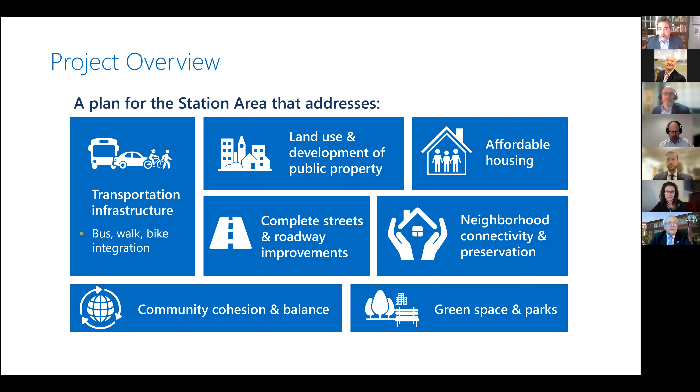Neighborhood connectivity and neighborhood preservation is something that very clearly was identified in conversations with the community as vitally important, along with community cohesion and balance, and opportunities to enhance green space and provide more open space and parks. So those are the areas of the plan we're addressing and the priorities for the plan.

Project goals: adaptive reuse of the train station, making it a multimodal transportation hub, improving neighborhood connections within the neighborhood and from the neighborhood to the station itself, ensuring provisions for affordable housing are built into the plan, filling in empty underutilized lots, whether surface parking lots or vacant parcels, preserving the historic neighborhood and historic character, and looking at opportunities to accommodate facade improvements to buildings. And as I mentioned, identifying future build out potential on both the east side and the west side of the station.

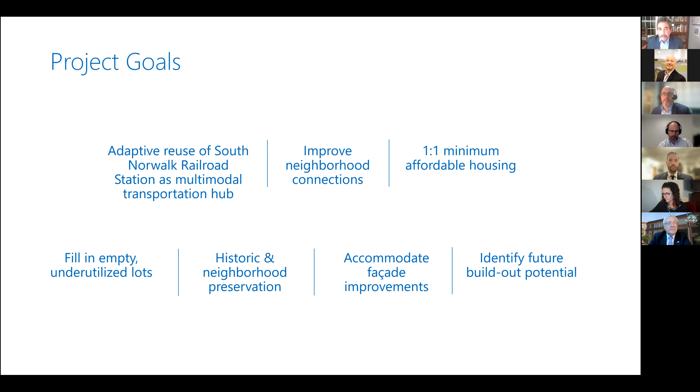To orient people, this is our study area identified. There are basically six areas. We refer to them as the east side of the station and the west side of the station. On the east side is basically the station itself, which includes the parking garage, the station, and the parking lots that accommodate commuters using the station. Also on the east side is number 3, the Lexington Avenue area. On the west side are three areas: the Housing Authority property identified as number 6, the SNEW property identified as number 5, and the private development area identified as number 4, with Dr. Martin Luther King Junior Drive on the western boundary of our study area.

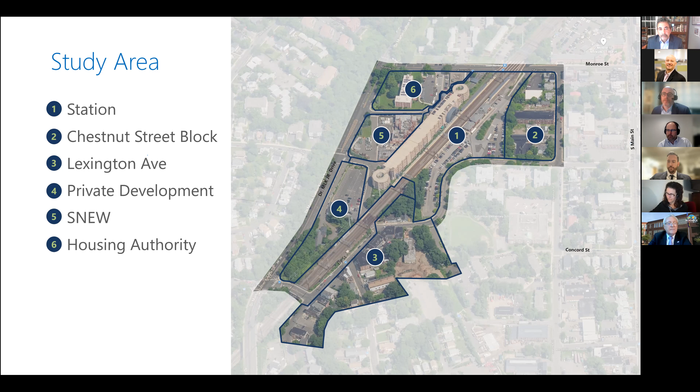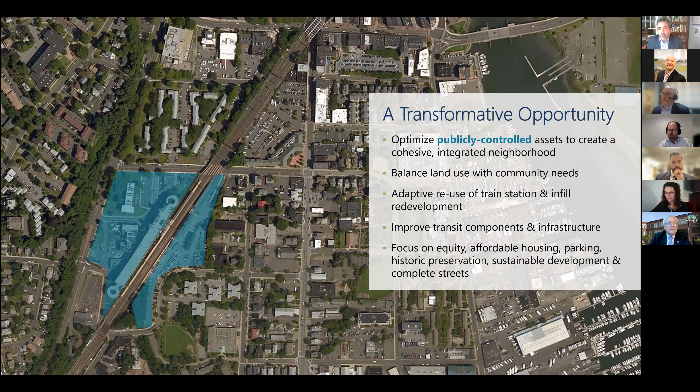So when we looked at this area, we really see this as a transformative opportunity for the city of Norwalk. You can see the study area identified in blue. We really want to optimize the publicly controlled assets. The blue areas are the publicly owned properties, and the yellow are the privately owned parcels within the study area, looking to optimize particularly the publicly controlled assets and create an integrated neighborhood.

Balancing land use with community needs was something clearly identified in conversations with the community. This includes looking at the adaptive reuse of the train station and infill redevelopment opportunities, improving the transit components and infrastructure around the station itself, and really focusing on equity, affordable housing, parking, historic preservation, sustainable development, and complete streets.

As Brian said, there's a lot going into this plan. It's all about trade-offs. We can't do everything, but clearly there are areas where improvements can be made. Based upon the community input we've received, we're balancing those needs with the future opportunities around the station itself.

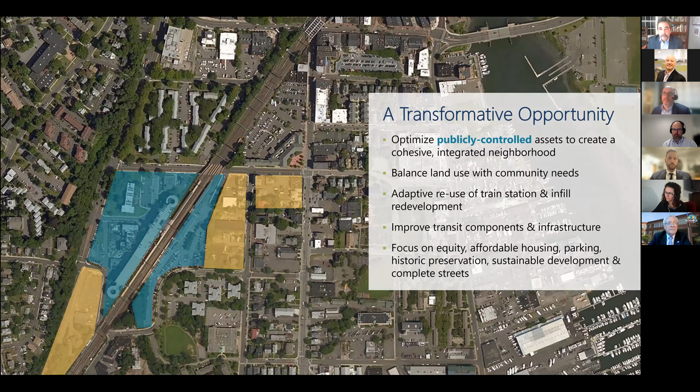Another area I highlighted is historic preservation and neighborhood preservation, looking at opportunities to protect the existing residential neighborhoods from inappropriate development, whether private or public, and protecting the historic building context around the area. You can see on this graphic there are a number of strong neighborhood assets and historic preservation areas we need to be mindful of.

We're looking to concentrate development, particularly higher density development, within a quarter mile of the train station, within an easy walk of the station, so people don't necessarily need to drive. They can walk from wherever they're living to the train station itself and take transit.

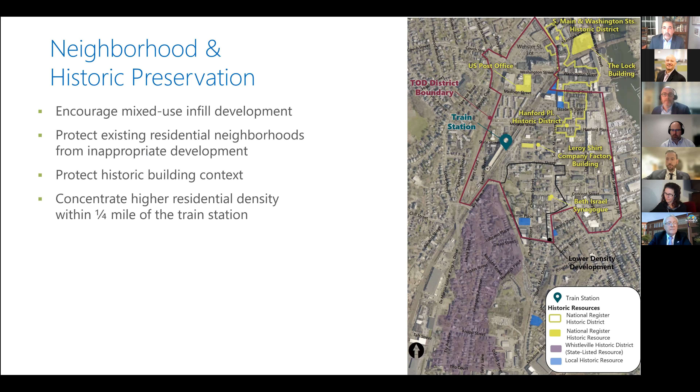As Brian and the mayor mentioned, I think one of the foundational elements of the plan is the extensive community engagement we've had. We've been working closely with a community advisory committee, as well as a technical advisory committee, presenting our work and getting feedback throughout the process.

We conducted a community-wide survey, and I'll highlight that in a moment. We got some really good responses on that. And then there are the public meetings, like the one we're having tonight—this is our second one. So I would just say that the plan has really benefited from good public input, and I would encourage people to continue to stay involved and offer their comments throughout the process of developing this plan.

So just to highlight a couple of the things that came up during the community conversations and the community input that we had.

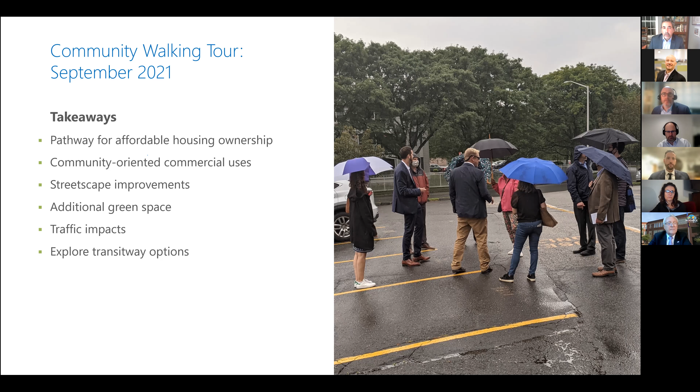You will hear momentarily from our traffic consultant, traffic expert, Joe Bauskas, on the traffic impacts, and then also on the transitway options. We have a portion of the presentation devoted to that as well. So these were the things that came up during our community walking tour.

Just some photographs of some of the areas that were identified during our tour of focus areas, the underpass at Franklin Street, needing better attention, the MLK Drive and Monroe Street intersection, bus activity at the station, Merritt Place. These were the highlights of the tour that we took with the community.

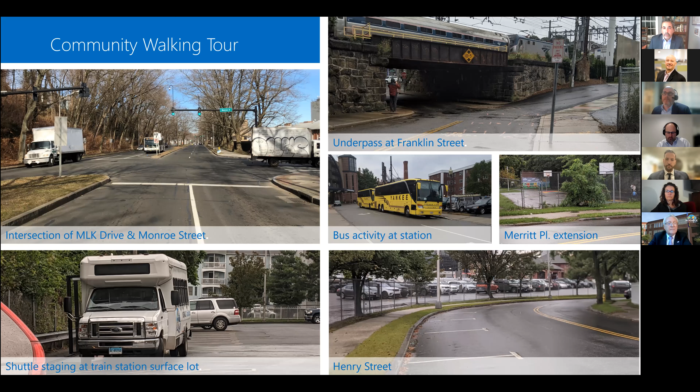There was also follow-up discussions with additional community input from District B, things like community amenities, facade improvements, tree planting programs, support for local service organizations, the YMCA and shelters, as well as preserving the quality of adjacent development, specifically the Columbus Court. And again, on the home ownership, a theme that came up was down payment assistance and opportunities to create home ownership for residents of the neighborhood.

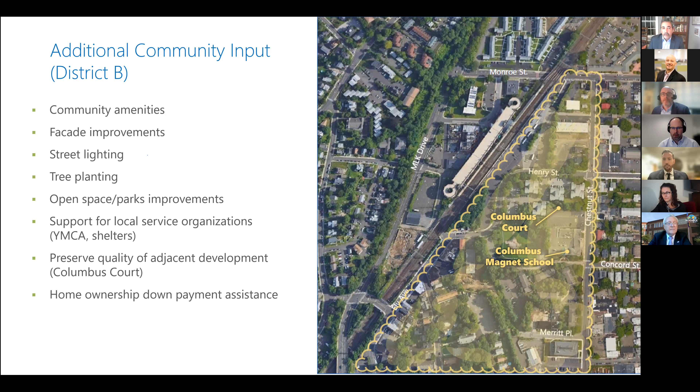As mentioned, there was a survey that was undertaken, approximately 280 respondents. Again, you can see themes coming up from the neighborhood conversations and surveys: a strong desire for neighborhood uses like grocery stores, restaurants, recreation facilities, and a strong desire for a more pedestrian-friendly walking environment with better sidewalks and improved lighting.

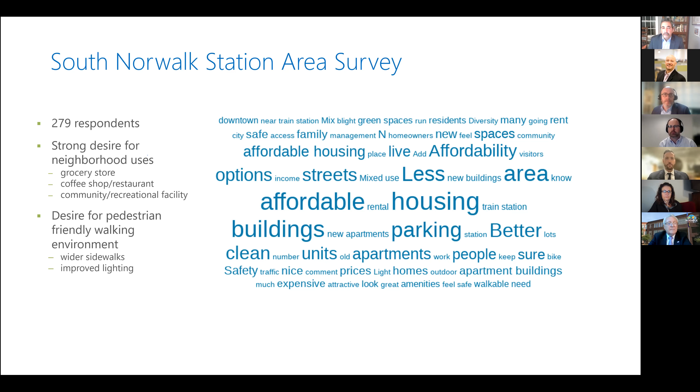Last month, we had another meeting with the Community Advisory Committee. We used that as an opportunity to have follow-up discussions from the September walking tour that was conducted. We really dug in more on the affordable housing ownership modeling, the transitway locations, the private development adjacent to the train station, updating the CAC on that, and then we reviewed as well the long-term development plan.

So as you can see, there was a lot of back and forth and discussions with the community leading up to where we are tonight. At this point, I'm going to turn it over to Eric Halverson, who is from RKG Associates. They are a consultant working with VHB and undertook the market analysis and looked at the affordable housing ownership modeling. So, Eric.

Great, thanks so much, Ken. Hi, everyone. Happy to be with you tonight.

Just in terms of the market, I think as Brian mentioned at the outset, Norwalk as a whole is a growing city, which is great from a market perspective. Over the last 10 years, both population and households have been increasing citywide, and as Brian mentioned, actually at a faster rate than both Fairfield County and the state as a whole.

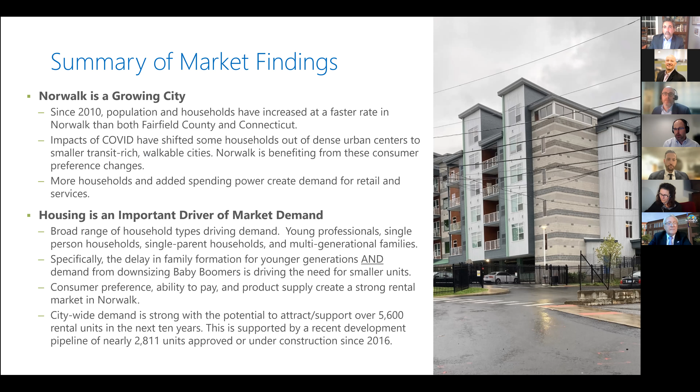Citywide, demand for housing is very strong, backed by the roughly 2,800 units that have been approved or those that are under construction since the year 2016. Next slide, please.

So looking quickly at non-residential market demands, RKG reviewed statistics on the office market, both in Norwalk and Fairfield County. Even prior to COVID, office demand in Norwalk had continued to weaken. In 2020, office vacancy was at about 29%, with a net loss of occupied space of about 400,000 square feet. But to project future demand for office, we look at employment trends countywide, and we assume a portion of that countywide employment will drive office demand in Norwalk.

While Fairfield County's office occupying sectors are projected to grow, Norwalk's current office vacancies could likely accommodate much of that employment growth over time. We do, however, believe that there are some opportunities for maybe some smaller scale office users to occupy ground floor spaces in mixed use buildings in South Norwalk.

And then lastly, we look at retail and restaurant space demand. The linkage between people living and those who might be visiting South Norwalk and the support they provide to our local businesses is critical, particularly when you have more people living within a comfortable walking distance to, say, a downtown, a main street, or a retail center. The frequency of visitation for those households will usually outpace those that have to drive or come from some distance.

In September of last year, 2021, we conducted a field visit and a walking tour of both the Washington Street and the South Main corridors, and estimated about 20,000 square feet of vacant first floor space for retail and restaurants. These spaces range from as small as 1,000 square feet up to as much as 10,000 square feet.

With the current amount of housing, both under construction or those that are in the approval pipeline citywide, we believe there's support for about 46,000 square feet of retail space. This spending power from these future residents could really help support businesses to both fill vacant spaces, maybe even expand their existing footprint for those who are active in the city today, and also support the planned new retail that's part of some of the proposed projects in and around the city.

In addition to collecting market data, RKG also worked with the team to develop a financial feasibility model for new development in the study area. This model compares development and construction costs for a project to potential revenues from that new development to then determine if a particular development scenario makes financial sense or not. Would somebody actually build it?

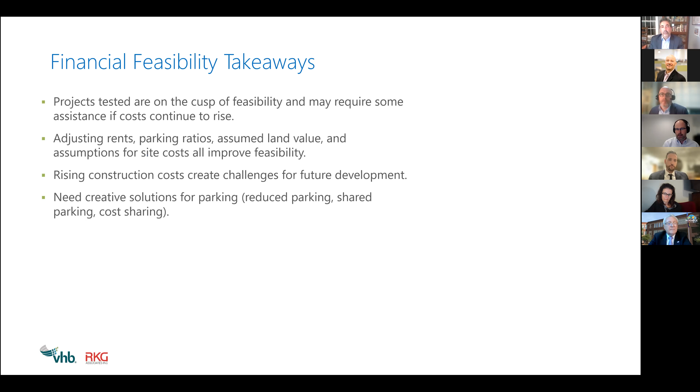And lastly, we recognize through our discussions, as Ken mentioned, just how important the concept of affordable housing and also affordable homeownership options are to the community. So we looked into some potential models that could be applied to this area and came away with three kinds of potential options for delivery of affordable ownership units.

These are ordered in the way in which we think they could be implemented, basically going from short term to longer term. So the first option is similar to what the city has in place now, which is referred to as inclusionary zoning and deed restricted units, basically affordable purchase prices. Through inclusionary zoning, the city essentially mandates through the zoning that a certain percentage of the units within a new housing development must have their sale price restricted or their rent rate restricted to an affordable price, typically set by the area median income.

The city has inclusionary zoning in place that regulates both rental and ownership development, mandating that 10% of all units in a development be made available to households earning 60% of area median income. Some cities have coupled this inclusionary zoning requirement with an affordable ownership down payment assistance program, since one of the more challenging barriers for low to moderate income households is saving enough for that initial down payment. This could remove a potential obstacle for those households.

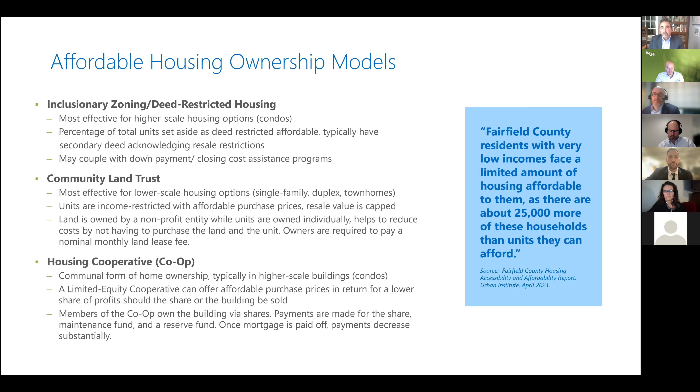I know we're going to move on, but I'll address Diane's point regarding green building design. That is definitely of critical importance to the work we're doing, as well as other work the Redevelopment Agency and the City of Norwalk are doing around sustainability and climate action planning. We're going to make sure a lot of the recommendations in this report reflect best practices from a green design perspective, as we have a transformative opportunity here to do things differently and do things right around the train station. So I appreciate your comment as well. But we have another good portion of our presentation to go through, so we'll keep moving here.

So here you can see the station layout and transit elements. I'm sure you're all familiar with the station, but here's how it all works. We have the bus drop-off and pick-up on the east side of the station, the surface parking lot also on the east side, and within that area there's also some space for bus staging. On the west side you can see the various garage access points, as well as dedicated customer parking for SNEW.

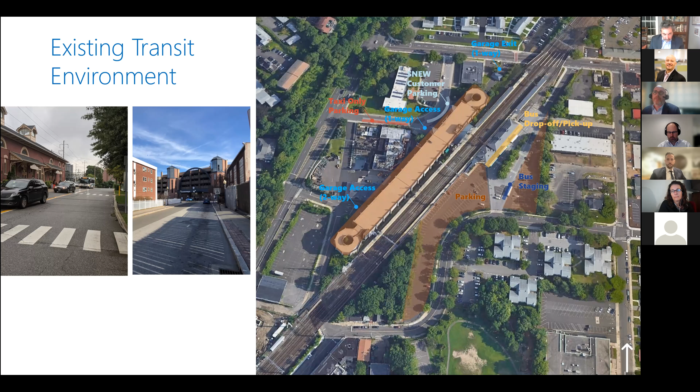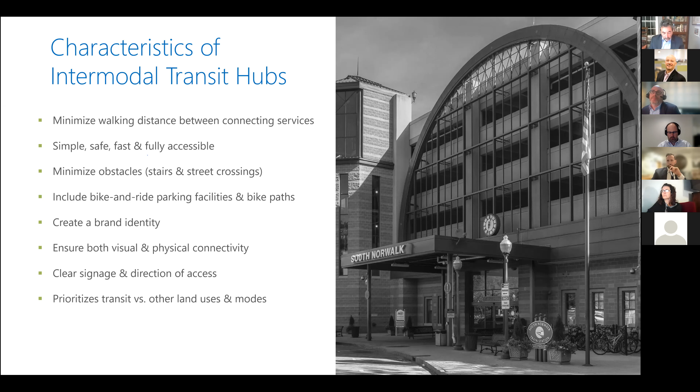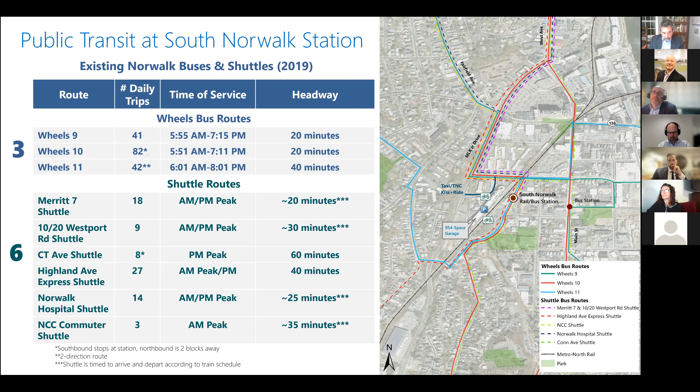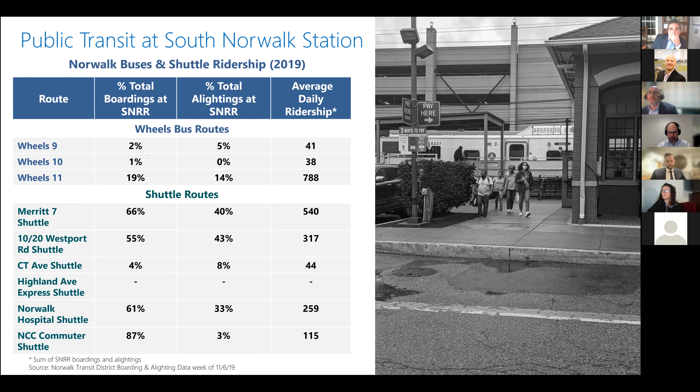So as part of this assessment, we looked at what we would need for bus space. I'll walk you through that right now.

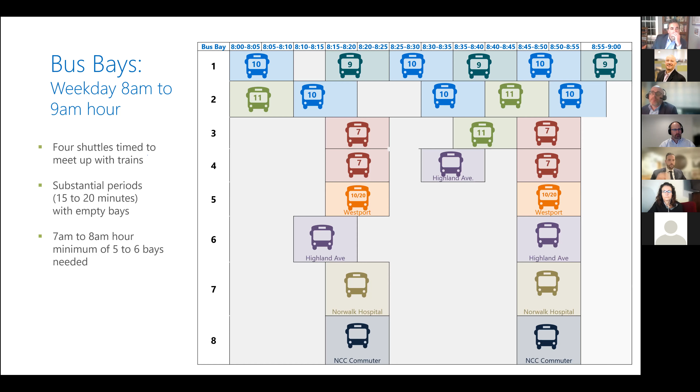One of the concerns we heard about a potential busway on the west side from the community was air quality emissions. We recognize this — this is more of a short-term issue, and it's important to keep in mind this whole plan is a number of years out, and bus technology is changing so quickly. So at some point in the near future, the bus fleet will be an all-electric fleet, and we won't have these issues with air quality. So really, that's a good thing.

Another significant challenge with this concept is that to implement the busway fully would require a relocation from the SNEW site. So we would need SNEW off that site to implement this concept.

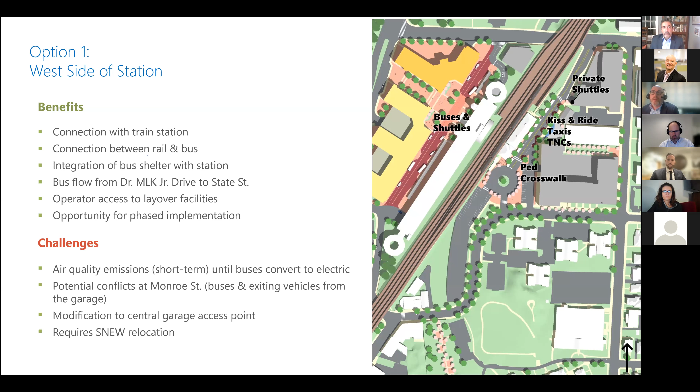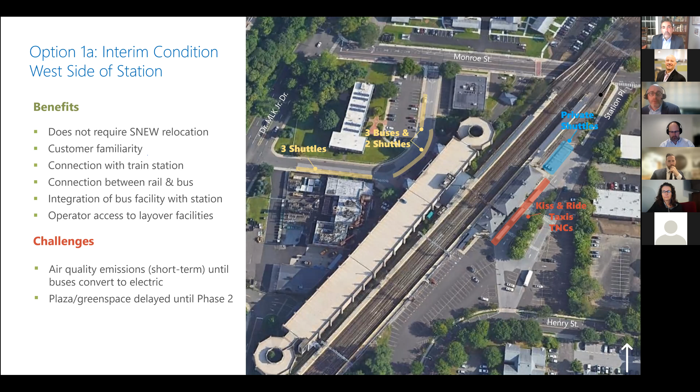I would mention on the east side, we would have the private shuttles and kiss and rides, taxis, and TNCs, so that would be for passenger pickup and drop off. An additional drawback with this is there is some dedicated SNEW parking for customers who would use the SNEW office, so that's something to consider as well.

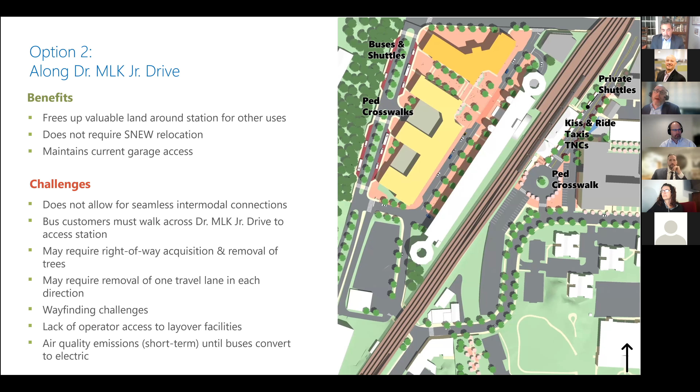Certain challenges with this concept include a lack of seamless intermodal connections. There is a distance that passengers transferring from bus to rail would need to walk — about 500 feet. So that's a bit more distant than previous options. This would also require removal of one traffic lane in each direction on MLK, so that's another drawback to this as well.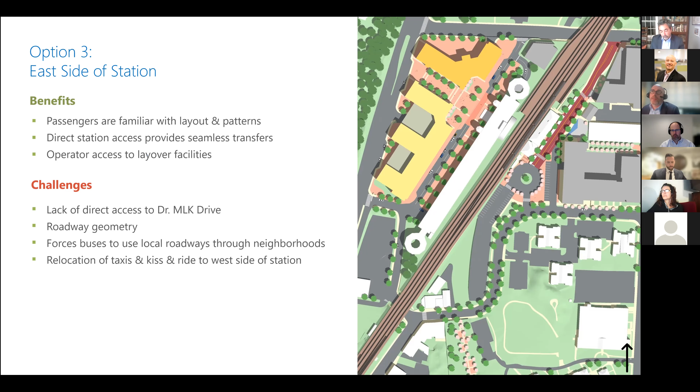So these are the three options we looked at. Here is a conceptual, high-level screening of the three options. We looked at locational decisions, aspects of transportation, environmental factors, as well as the ability to implement. The east and west side options score well.

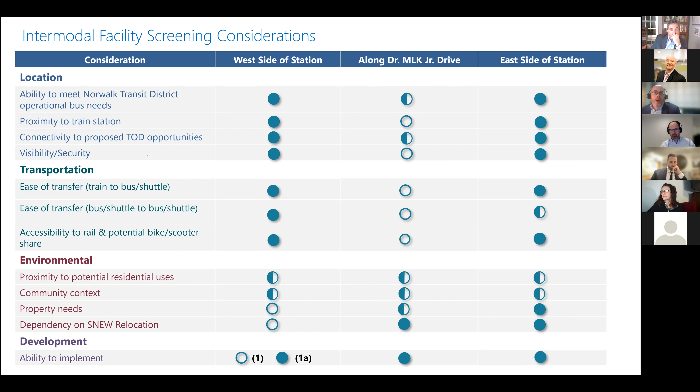Our recommendation in the near term is to utilize the east side of the station for the transitway as an interim measure. Longer term, once SNEW is relocated, our recommendation would be to build out the west side of the station for the transitway. This would offer the long-term opportunity to develop South Norwalk Station into a really integrated transit facility for the future.

So quickly, here are our transit recommendations. As I mentioned, on the east side of the station, we're recommending that for near-term implementation. The west side transitway in the longer term offers long-term benefits, operationally for better bus operations. This is something the transit district can also account for as they plan, should they plan for a bus network redesign to improve their system — the ability to reduce operating costs with a dedicated facility. It also offers the ability to better time buses to optimize transfers, and layovers can also be prescribed.

And I should mention, with the west side transitway, the east side can really be used for passenger pickup and drop-off, pedestrian-focused infrastructure, and bike facilities, and that side of the station creates a connection to other areas of South Norwalk. So on the whole, that's our look at transitway recommendations.

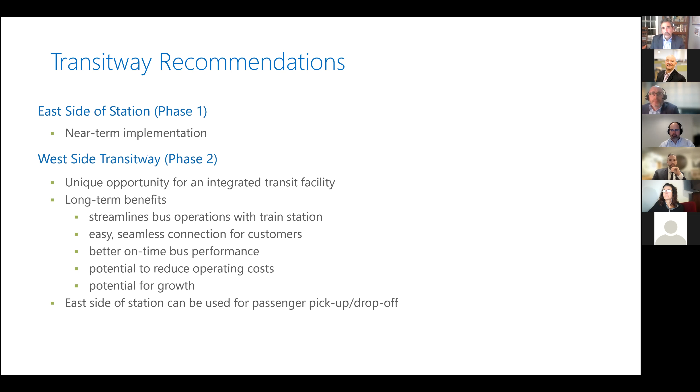And now Brian and Ken will walk through the development concepts. Thanks, Michael. I think some of the transitway discussions are very tied to some of the development concepts we're going to be talking about tonight.

I wanted to provide a little bit of context on what we did and how we got to where we are with the development. As we stated before, there's a huge opportunity in the fact that you have these publicly controlled assets on the west side of the train station. Michael, if you don't mind going to the next slide, so I can have a map for reference.

For those acclimating here, we have the Housing Authority property as well as the SNEW site. The Housing Authority is interested in modernizing their facilities and hopefully increasing the amount of affordable housing currently on that site. And the SNEW site, some could argue, is not really at its highest and best use — it's not really serving its intended original purpose, serving more of an administrative and maintenance function. Could we reimagine this site to achieve some of the goals expressed tonight, even in the comments we're hearing today?

So there's interest in having additional affordable housing, interest in maybe increasing some density over there to make those numbers work, or introducing new construction types to the area. We looked long and hard at what could and could not be done in the area, both from accommodating density and accommodating units, and then what impacts that would have on infrastructure. Going back to the theme of balance, as you grow, you need to make sure you're growing responsibly — economically, socially, and also making sure that whatever development you're introducing doesn't come at the expense of local area residents in terms of how they currently use the area.

As the mayor sort of brought up at the beginning of the session, you're wanting to strike a balance between welcoming new residents to Norwalk while also protecting the homes and lives of existing residents, and wanting to find that balance within these sites.

Good evening, Joe Bauskas, VHB traffic engineer. I've been working in Norwalk for the last 30 years, and I've been tasked with the transportation mobility section of the TOD study. I want to talk briefly about a few things with this transportation.

Number one, connections - the connections provided by the train station with excellent roadway access between Washington Street and East Norwalk. Dr. Martin Luther King Drive and South Main Street all provide excellent access to Interstate 95, as well as the surrounding neighborhoods with street access. We know MLK Drive and Water Street are major arterials. South Main Street and Washington Street are minor arterials, and there are a lot of collectors involved, including Monroe Street and Hanford Place, which really provide accessibility to the train station.

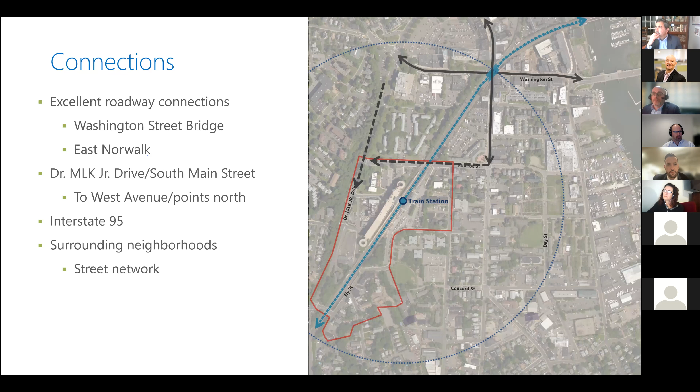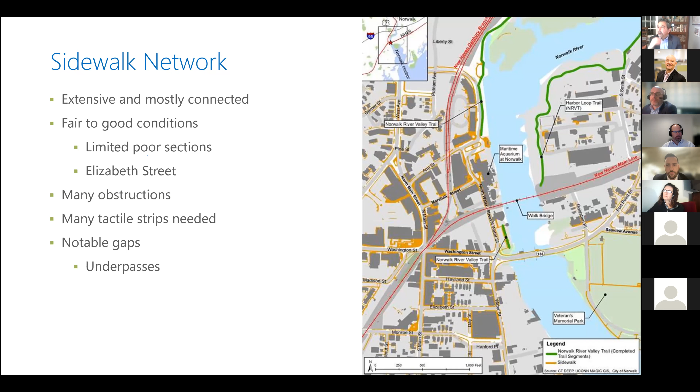The sidewalk network itself is extensive and mostly connected. There are a few areas in need of repair, and we know there are some obstructions along parts of some streets, based on previous sidewalk surveys that were done. We also know there are areas where we need additional ADA improvements and some notable gaps under some of the underpasses. So there's some minor work to be done, but overall the network is connected for the train station.

In terms of the bicycle network, there are limited on-street bicycle lanes, which is a constraint from the urban type of development we have around the train station. There are limited bike lanes on Monroe Street, Washington Street, and Water Street. The city is proposing bike lanes on MLK Junior Drive with proposed shared roads on South Main Street. The intent of the bike network is to connect to the Norwalk River Valley Trail across the river in the future.

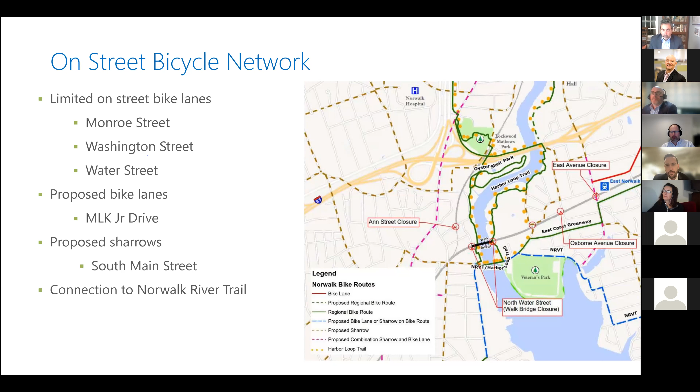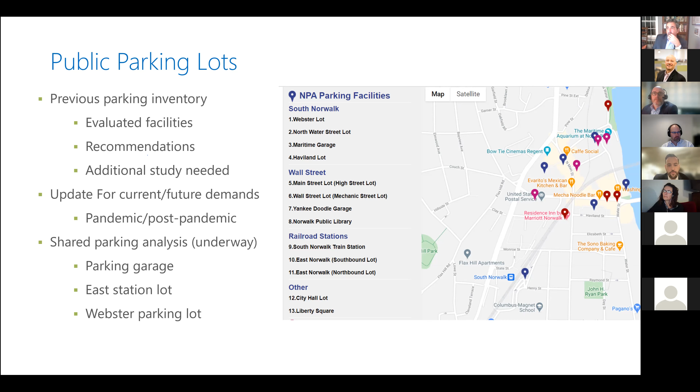In terms of parking, the train station has an extensive parking garage, a parking lot on the east side of the station, as well as Webster lot and many other municipal lots in the area. We've evaluated those parking lots as part of previous parking studies, and we're also conducting a shared use parking study for the train station parking lots and Webster lot, to see if there's potential for shared parking during the overnight hours.

In terms of transportation impacts, we reviewed the recently completed and pending projects in the area of the train station, including the platform that was talked about, the Monroe Street development, and the Spinnaker East Side Station development that has also been discussed. We've incorporated all of those into our traffic models developed for the TOD study.

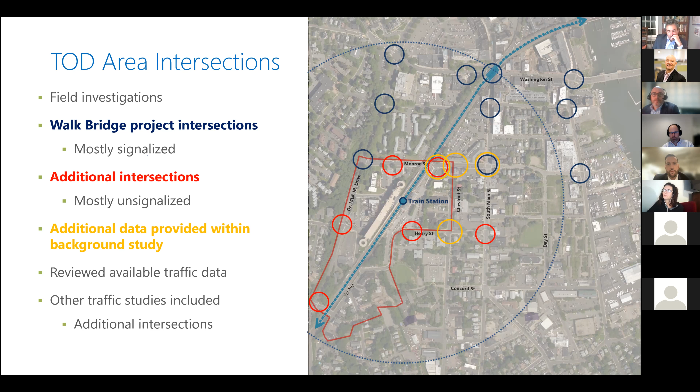We also looked at the new development at the train station, examining the traffic generation based on the Institute of Transportation Engineers Trip Generation Manual. We conservatively estimated over 700 residential units with some retail, and we looked at the traffic generated from vehicle, pedestrian, bicycle, and transit ridership. We distribute that traffic to the roadway network, including MLK Drive, Monroe, and points to east Norwalk, as well as some to the south.

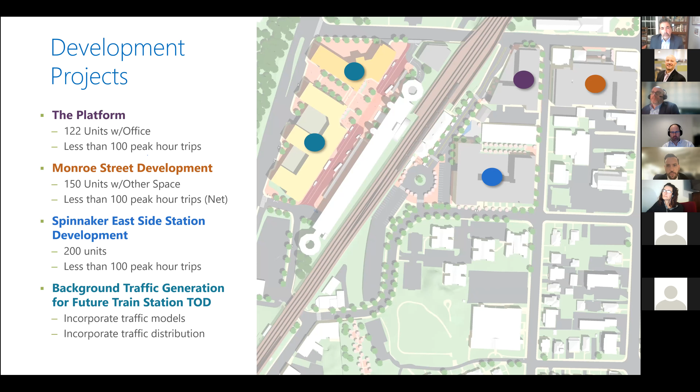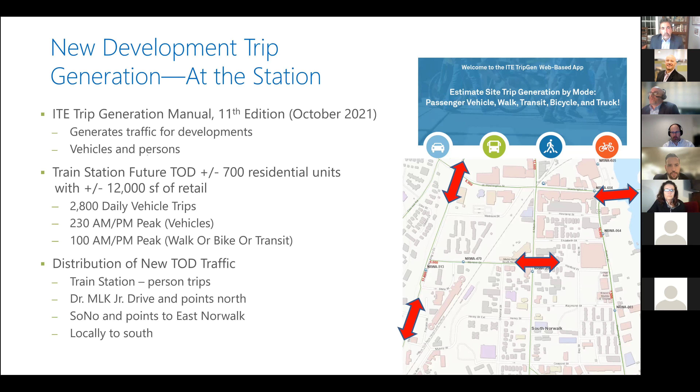From that, we developed an analysis of the intersection operations in terms of level of service, which characterizes intersection operation during the peak hours. We graded it from A to F, with A and B in green, C and D in yellow as acceptable, and congested operations being E and F. In the morning and afternoon peak hours, we found no congested operations, but some locations with levels of C and D at some of the major intersections involved in the TOD study area.

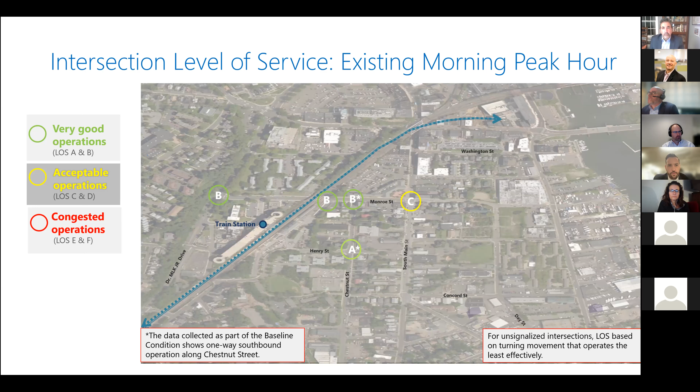For the afternoon peak hour, we're still looking at pretty good level of service at the primary intersection serving the train station. From there, we added in all the traffic generated by pending and planned, as well as recently constructed developments, including the development around the train station with the residential units we've shown, giving us our future level of service at these intersections.

We have one cautionary intersection, the Chestnut intersection, where Monroe goes to level of service D, which is still acceptable, and the other intersections are at level of service C. So for both the morning and afternoon peak hours, we're not seeing congested operations, but we are seeing some reduction in level of service that basically accommodates the future traffic being generated.

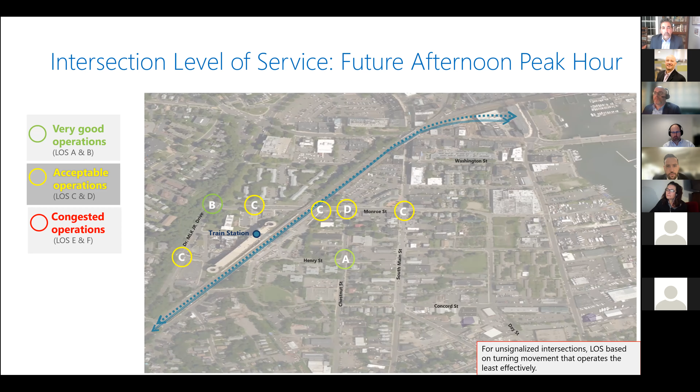So in summary, what we're looking at in terms of the transportation infrastructure is excellent access to the train station and surrounding neighborhoods. We're looking at supportive infrastructure that's involved. We have the street classifications that can accommodate the traffic, with moderate peak hour and daily traffic volumes on the roadways themselves.

I did mention before about the crash history. We don't have any unusual patterns of crash history at these intersections, which is helpful. And we're looking at intersection operations that don't have any significant impacts.

We see some reductions, but basically a level of service D operation or better at these intersections. And mitigation, looking at mostly retiming of the traffic signals at the various signalized intersections, some retiming and some revised phasing to better accommodate the traffic volumes being projected from the pending and planned development as well as the future development at the train station.

With that, that's my presentation.

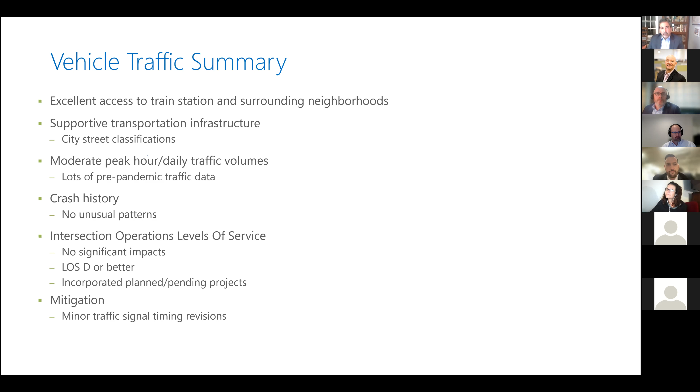In terms of next steps, we are looking to continue to obtain valuable community input on the plan. We got great comments this evening, so if there are any additional comments, thoughts, or suggestions on the draft plan, please let us know. We will be working to refine the plan and then bring it before the Redevelopment Authority for plan adoption and move towards implementing some of the recommendations coming out of the plan itself.

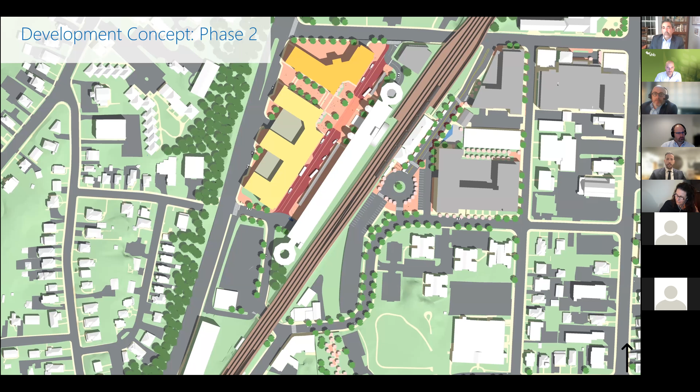The western side gets trickier because there are a lot of moving parts, like the relocation and remediation of SNEW and figuring out where their operations could go, since they still need to accommodate that, plus some of the housing authority considerations in how these deals are structured. So I'd say that's more in the 4 to 7 year time frame, if not 5 to 10, on the western side. But really this process we're engaged in right now is to define what that looks like and map a way forward, and as soon as we adopt this plan, get moving on implementing some of these projects and recommendations.

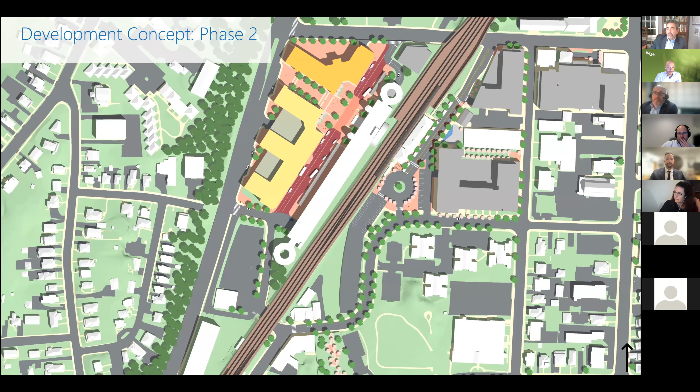Thank you, Alan, and thank you for pronouncing it -- I answer to either of the pronunciations of my last name, so I appreciate that. I wanted to echo what the other Diane on the call said about renewables and solar panels. I pray for the day when it is a policy in our zoning regs that it must be opted out instead of opted in.

As a member of the Connecticut Green Building Council, I also wanted to raise that because of climate change, we are seeing increased rainwater and intense storms -- maybe not as many storms, but the ones we have are intense.

So I wanted to see if this particular project could really take a look at our polluted runoff. I've noted that all of the things proposed introduce more impervious surfaces, which means less chance for water to slowly and naturally infiltrate into the soil as one of the tools in the toolbox for stormwater management. I've been around a long time in Norwalk, and I've heard a lot of intention around utilizing green building design and green infrastructure, but I haven't seen it put into action often enough.